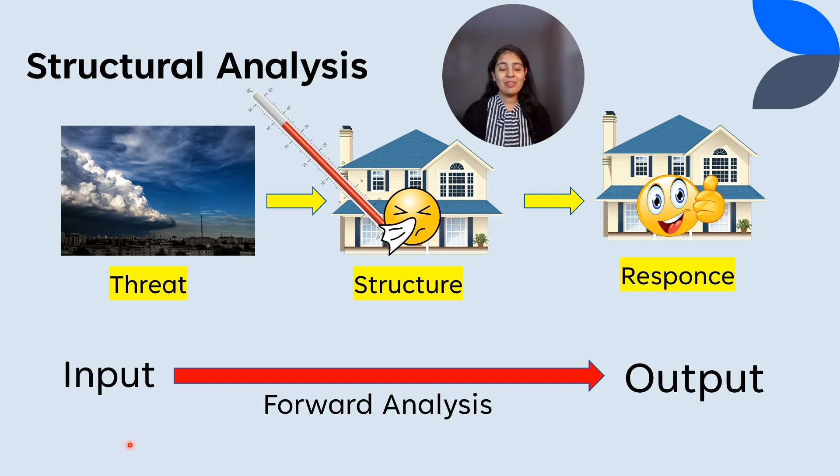So here are the threats. Some natural calamities like wind and earthquake make our house, our structure, ill. We need to protect them and see the response of our structure. This is called the forward analysis.

Structure idealization: you know, the physical system is really complex in nature. We cannot solve it or analyze it as it is. So we convert that physical system, or idealize that physical system, into its simplified form.

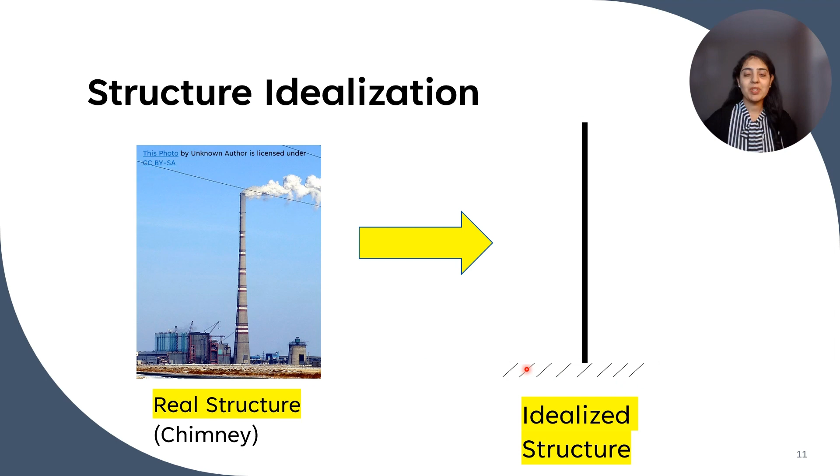In the picture, you can see a chimney. Now this real structure is idealized like this: what you can see is a line which is fixed at its support. So what are the assumptions? This chimney is really a tall structure; its length is really long compared to its cross-sectional dimension. So we can consider it as a line. And as this chimney is fixed to the ground, we consider it here as a fixed support. So this is the idealization of this real chimney as a single line structure which is fixed at its end.

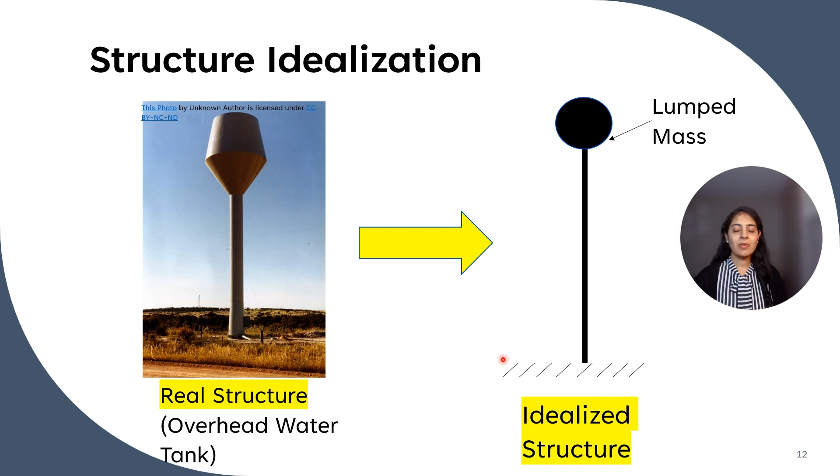We will see another example of structure idealization. In this picture, you can see an overhead water tank. It is similar to a chimney; it is slender up to here, and the water mass or weight of water is concentrated here. So we consider it as a line element, and the lumped mass of water is represented here with a fixed support at its end.

This is the third example of structure idealization. You can see here a truss bridge, and it has been modeled, or the mathematical model of the truss bridge, or the idealized structure, is shown on the right hand side. Every member is shown in the idealized structure, and it is considered as a line member.

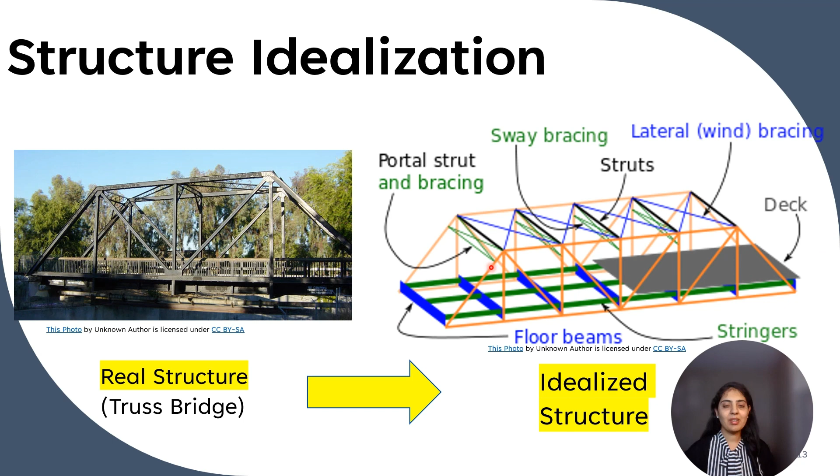This is the idealization of the frame model. Building frames are modeled like line members of beams and columns. It is idealized.

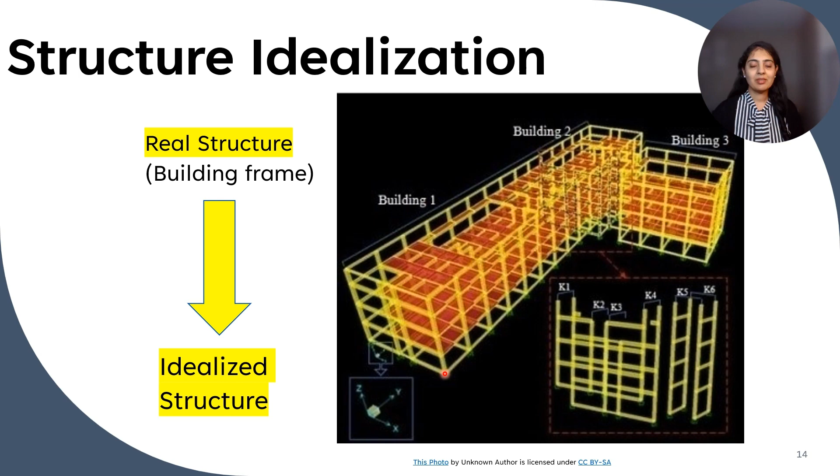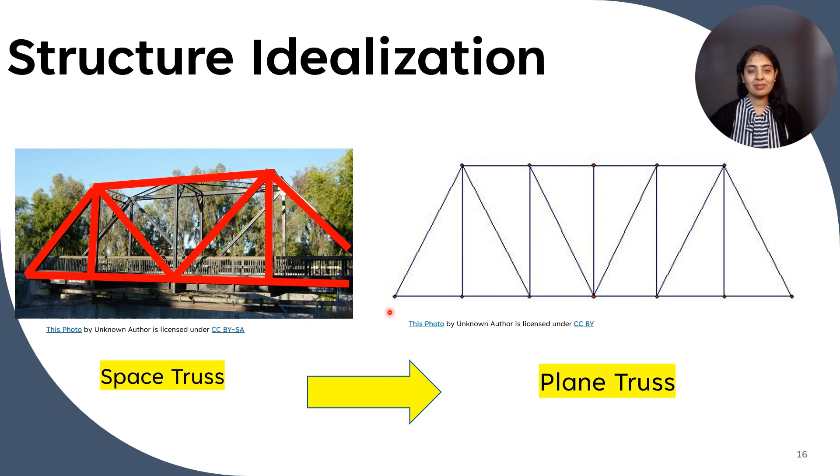Now in this picture you can see a space truss. This is the line diagram; the lines are marked for the members, and a similar truss is there on the other side. These two trusses are joined by members, so it is three-dimensional. It is called a space truss. For our idealization, we consider it as two-dimensional, with line elements.

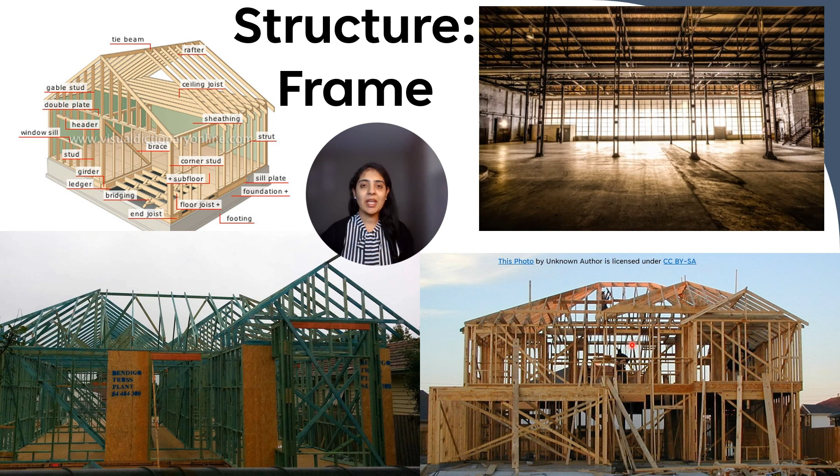Frame: what are frames? This is the frame of houses and buildings. This is the difference between truss and frame. In subsequent videos, from the engineering mechanics point of view, we will see beams, cables, truss, and frames.